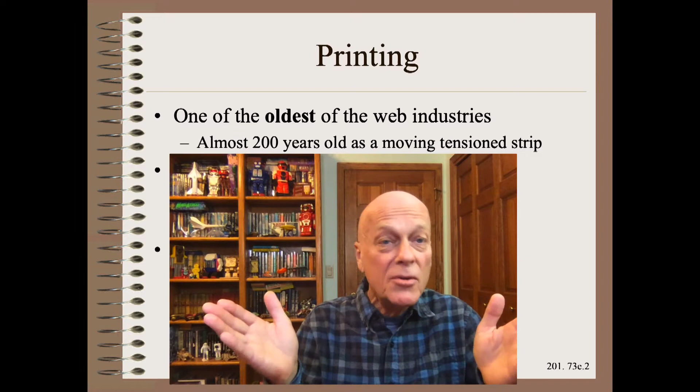Printing is one of the oldest of the web industries, almost 200 years old as a moving tensioned strip. Printing is also one of the largest in terms of numbers of converting machines. One count had the number of web converters, excluding printing, to be about 5,000 plants in North America. However, that same source estimated that there may be as many as 50,000 plants that do roll-based printing. Of course, many of them are quite small, such as your neighborhood copy shop or photo film printers.

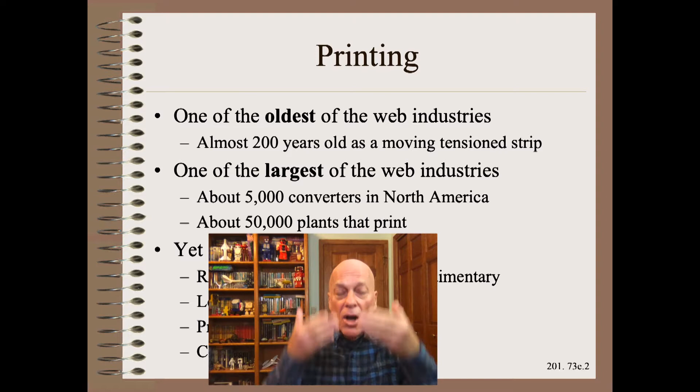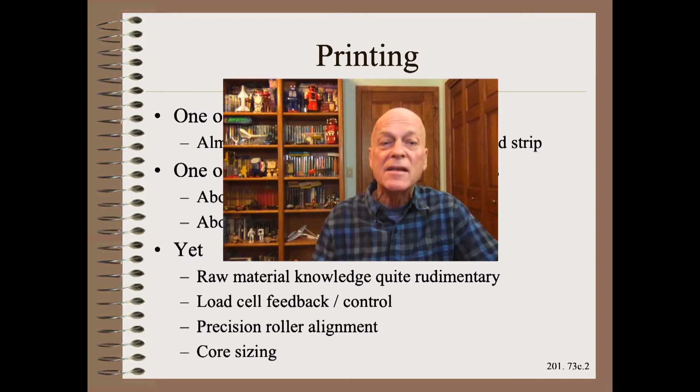Yet, printing had and still has a number of cultural blind spots. They included only a rudimentary knowledge of the raw material they were buying, as well as certain aspects of mechanical and control design of their own machines. Sometimes it is helpful to see where we've been in order to better see where we are and where we might be in the near future.

Mass printing, instead of hand copying, began in 1440 with the invention of the famous Gutenberg press. While this increased printing rates by orders of magnitude, it is not web handling. That began in 1843 with the Hoe press, which is a roll-to-sheet operation. Let us fast forward to the 1960s, where a substantial improvement in web handling began. This is in large part due to the paper mills teaching their printing customers some best practices that the mills had already known for some time.

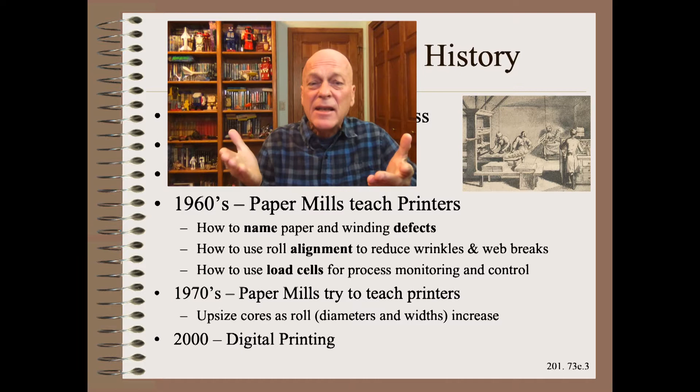This began with clearer communication between the mill and the printer on the names of paper and winding defects. Classification and thus unique naming is the first step on the road to troubleshooting. Other things that the paper mills did for their customers was to teach them best practices related to roller alignment and load cell tension control. However, these teachings were not always and universally appreciated. Perhaps the biggest missed opportunity was core sizing that had to increase as roll sizes increased.

Almost independently, we saw digital printing skyrocket about the year 2000. Here, digital printers did not have the legacy and inertia that the 150-year-old flexo and 50-year-old roto printers did. Thus, digital printers went from concept to space-age designs in just a few short years.

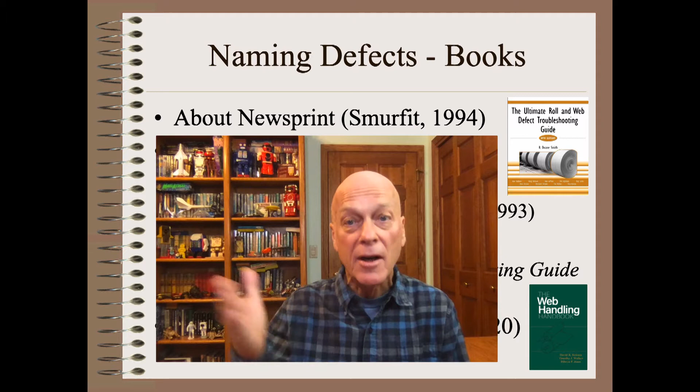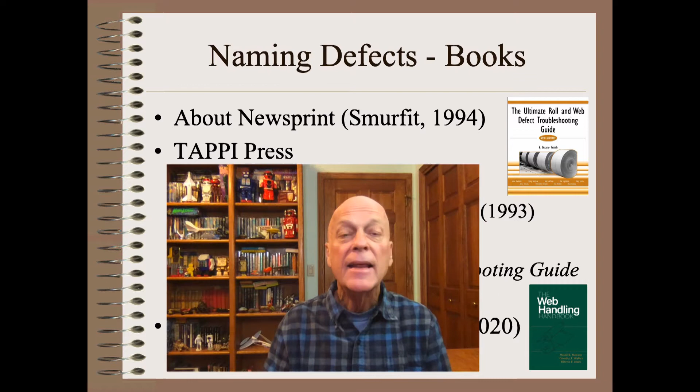The paper industry was the first to standardize the naming of roll and web defects. The first prototype was a widely distributed book titled About Newsprint, written by a large paper company and distributed to their customers, as well as used by their competitors. TAPPI is the largest paper trade organization and one that we all owe a huge debt of gratitude, even if we don't make or use paper. That is because they standardized testing and teaching.

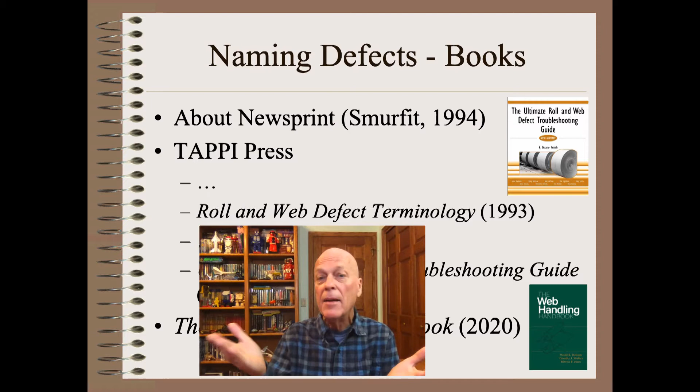After some early efforts, they published the Roll and Web Defect Terminology book in 1993. That covered most defects you would ever see in paper. After several more editions, the book was greatly expanded to include a wider set of defects found in other non-paper materials. The Ultimate Roll and Web Defect Troubleshooting Guide is one of the 2 must-have textbooks for every library. It is a veritable encyclopedia of proper names, causes and cures, and other information on more than 500 defects.

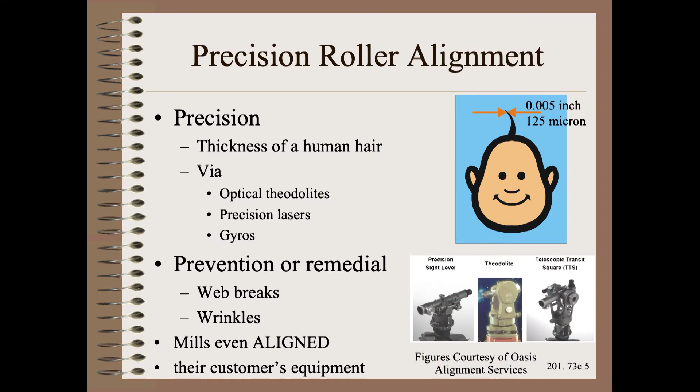Precision roller alignment was essentially invented by the paper mills because paper is demanding in that regard. Else, you greatly risk web breaks and wrinkling. When I say precision, I mean routinely achieving real-world accuracies of better than the thickness of a human hair, or about 5/1000ths of an inch, or about 125 microns. For more than a half a century, there was only one set of tools that could achieve that, and that was optical tooling centered around theodolites, telescopic transit squares, and precision sight levels.

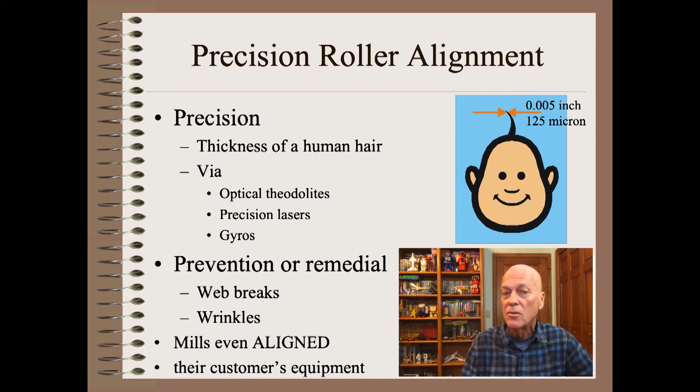In the last 20 years, we saw the invention of a precision gyro from only one source and precision lasers by 1 or 2 sources. While these instruments only approached the accuracy of optical tooling, they were much faster to use.

So proficient were paper mills in this alignment that they not only taught their customers, for the most part printers, how to do this, they even did the alignment for their customers. Some large paper companies kept several alignment crews on the road, servicing their printer customers across North America. The entire paper chain benefited from this unique customer-supplier program.

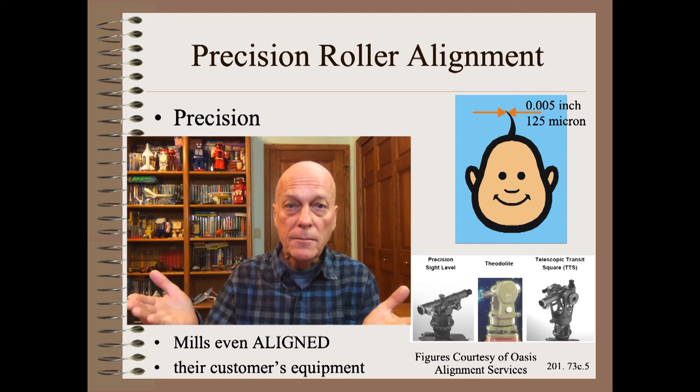Registration is the color-to-color accuracy in the final print. Registration is quite sensitive to web tension. Web breaks are even more sensitive to web tension. Yet, for more than a century, the printing industry did not have any way to know what web tensions were on their printing presses. Paper mills came to the rescue by showing their customers how easy it was to install load cells and how useful they can be for process monitoring and troubleshooting, even if the load cells were not used for motor control feedback.

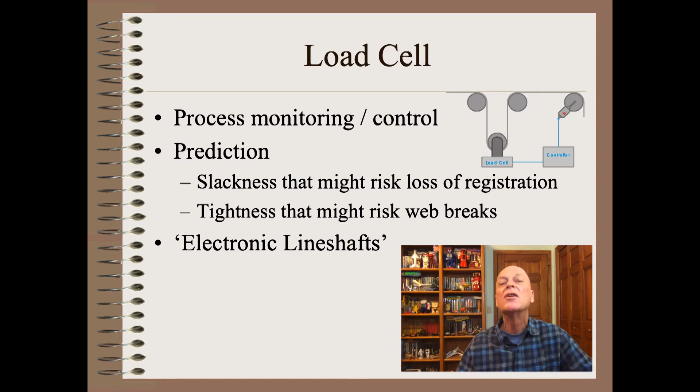The printers then also learned from the paper mills, who were among the first to do AC vector and later servomotor control. The result was the so-called electronic line shafts that reduced mechanical complexity and, in many cases, improved registration quality on a wide variety of web machines, including printers.

The 1970s saw a rapid increase in roll widths and paper roll diameters. That, in turn, caused an enormous increase in several types of core or near-core defects. That should be no intuitive surprise, and the details of what, where, and why are well taught in my award-winning and trademark Web 101 class that has been taken by 5,000 students.

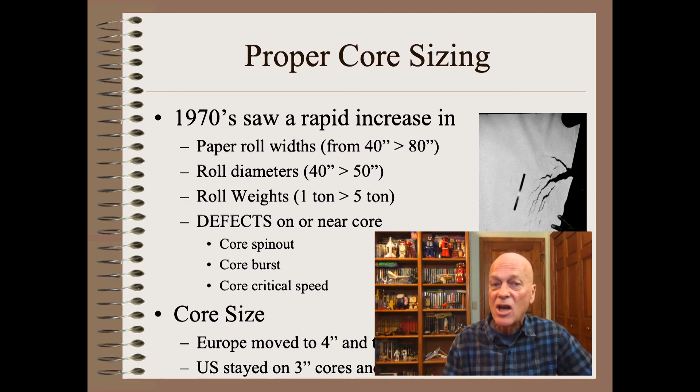In any case, paper mills provided massive incentives to their printing customers to increase core sizes to help mitigate this rapid increase in waste and delay due to supporting heavy rolls on too small cores that were no longer up to the task. Mills went so far as to even offer to rebuild their customers' chucks and shafts to take the needed larger core diameters.

It is interesting to note the cultural differences in outcome. While Europe eventually updated core diameter for larger finished roll sizes, the United States, for the most part, stayed on 3-inch cores and still do. Printers and mills alike suffered and still suffer from undersized cores.

For a century, printing was either flexo, for shorter runs, or gravure for long runs of high-quality magazine papers. These industries were so large and so old that they became insular, and as a result, were largely unaware of web handling, with the exceptions that we just discussed, which came, for the most part, from their suppliers. However, digital printing did not have that legacy and inertia. They only had ink and inkjets, and had to start from scratch with machine design. They literally went to school and thus jumped into the space age almost from the start.

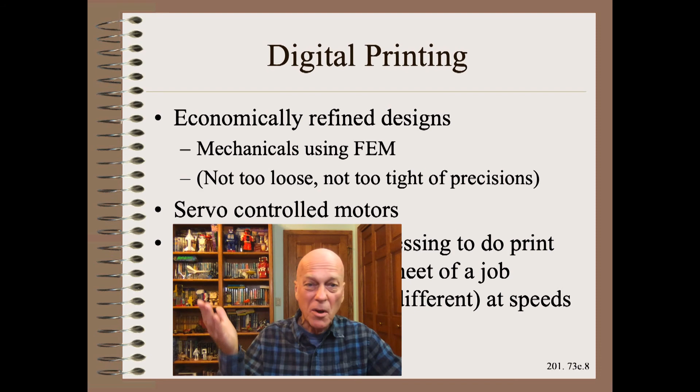Some digital printing press manufacturers use exceedingly sophisticated engineering design analysis. Their rollers and frames are no more or no less than just what is needed for the job. They also began with servo-controlled motors without ever having to work with the legacy of DC motors and line shafts.

They also pioneered massively powerful computers that could handle the process of the firing of thousands of inkjets so that each page of a job could be different than the preceding, and to do so at blinding speeds. Perhaps the only thing else close in computer horsepower is found in paper mills with motor control and optical defect detection.

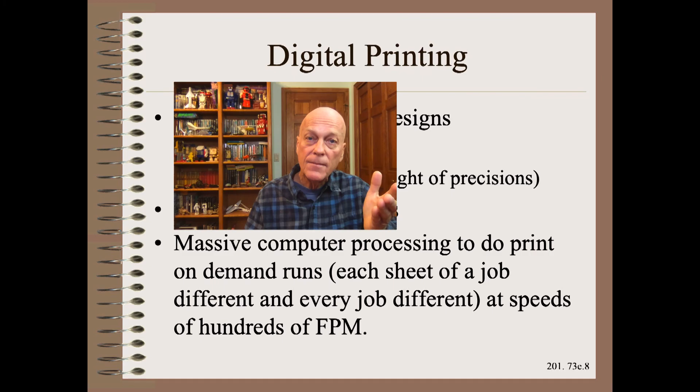Thank you so very much for joining me in this Insular Industries mini-series. Please join me next week, where we will continue our discussion of cultural handicaps by critiquing another of the mega industries, film.